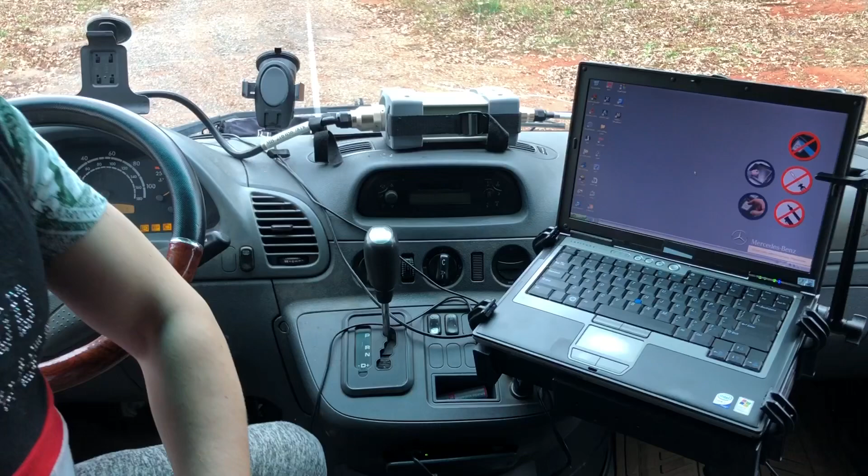In today's video, we're going to be using my new Star Diagnostic system, and we're going to try to diagnose this Sprinter van. So anyways, I have everything plugged in. Here's the multiplexer right here, everything's connected, and I got my key to the second position. So let's go to Xentry, double click that, and open the system up.

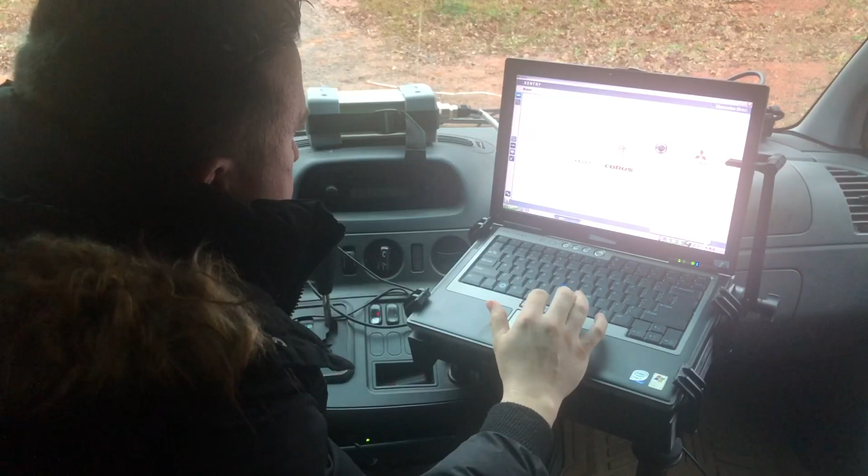Let's see what happens. So anyways guys, I'm into my system, everything's plugged up. We're just gonna go ahead and dive in. I will make more videos accessing all the systems, but right now the main thing I'm interested in is diagnosing my Sprinter van.

So we have all kinds of different models here, so I'm going straight to van, and I see Sprinter 2, Sprinter 1. Mine's a Sprinter 2. I just connected my Sprinter for the diagnostics for the first time, and turns out when the vehicle's off and the key's in the second position, it was giving me a communication error where I could not find the VIN number. Well, I turned the vehicle on and now it's actually communicating with this unit.

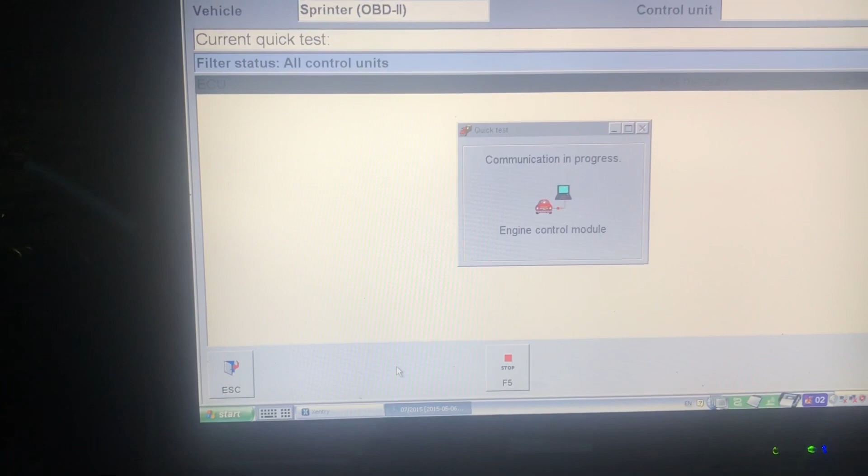So let's click F2 again, and let's do the quick test. The interesting thing about it is it needs to be running for this test to begin. I was already beginning to think, why is it not connecting? Because it's telling me that it's either a fault at one of the pins, like pin 11 where it plugs into OBD2, or with the system itself. So hopefully this is going to be working pretty good.

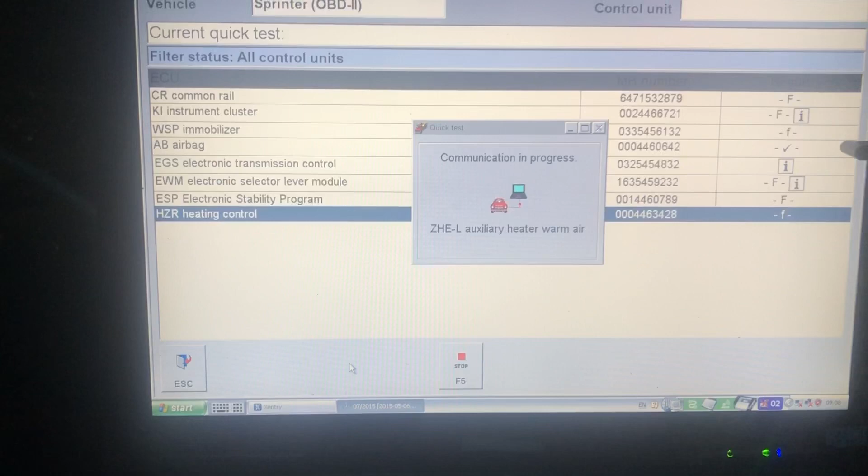Now I'm still very new to the system, but believe me when I tell you, I'm definitely going to be studying this thing, using my own Sprinters and looking into all the diagnostics. The very first thing, but not the last thing, I want to do is remove the speed limiter on this Sprinter. I would like to have it go unlimited speed, even though I'm not going to be using it, but that's something I definitely want to do. And I definitely want to find out what's wrong with my ABS system, because the ABS warning light is on, as you can see, and the check engine light is on as well. Definitely interesting what's wrong with that. Let's see if I could actually test that further.

So, some of the tests I'm going to do right now - it is dark, but this is gonna be my first run at it, and then I will learn from it and move on, and make a second test when I'm actually getting the data results.

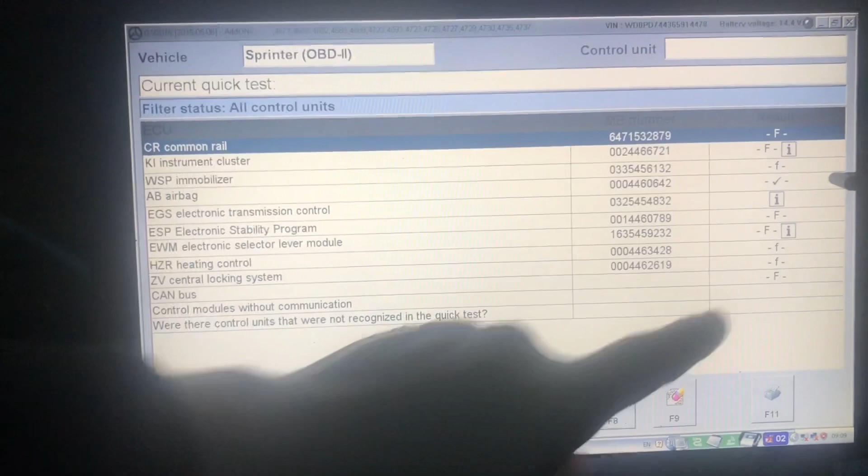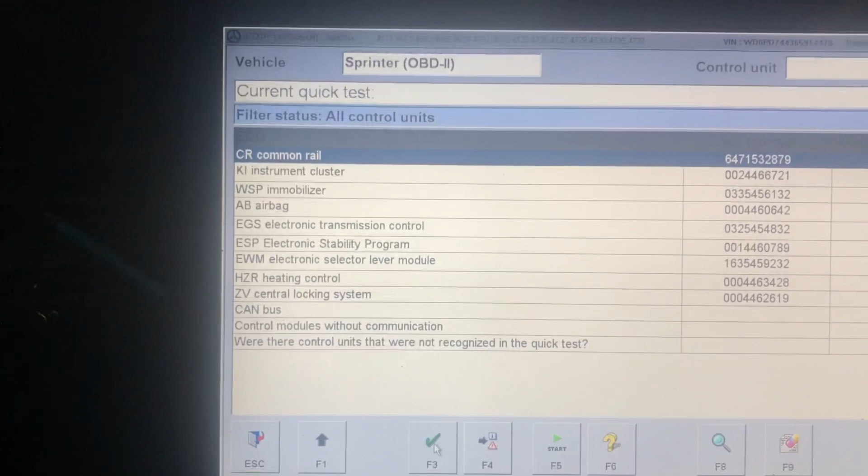Obviously F means fault, and then we have fault with information, which is an I. The check mark means it's a pass, and I don't know if this is right, but it seems to me that we have a lot of faults. I don't know why this would be, if it connected the proper way. Yeah, let's see here. Yeah, there's definitely a lot of stuff.

CR, common rail. Let's just go ahead and test that. Okay, so I need to confirm for the safety. Control unit, current fault codes. Let's do stored fault codes.

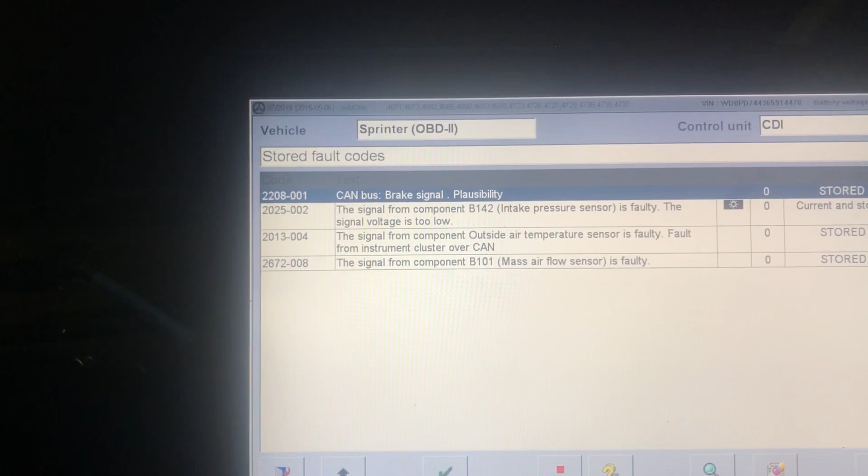So what do we have here? This is the signal from component B142. Intake pressure sensor is faulty. The signal voltage is too low. Current and stored. The signal from component outside air temperature sensor is faulty. Fault from instrument cluster over CAN. The signal from component B101, mass airflow sensor, is faulty. Wow, mass airflow sensor is faulty.

It is interesting - a lot of times these codes will get thrown if just one thing malfunctions, then everything malfunctions. So from what I could see already, this little light thing indicates that this is current. Obviously this is not. So let's see what my options are. Let's see, what is the stop here? Stop monitoring. We have ambient data, delete fault codes.

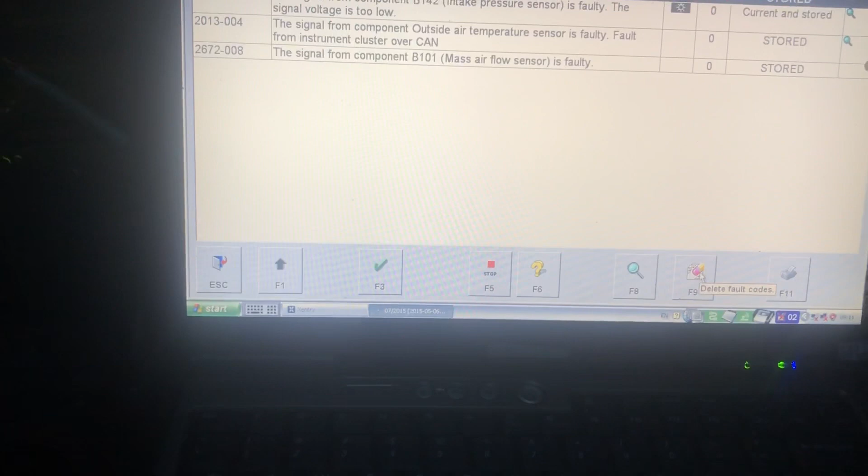Okay, let's go ahead and delete these fault codes. Switch ignition off, it says. So let's see. Ignition was switched on, so let me see if we can hit OK. So it just crossed those things out.

Now let's see here. It may be already disconnected, so let's just hit the faulty error during initialization. So I'm gonna go ahead and put the key to the second position, switch off ignition, and then switch on.

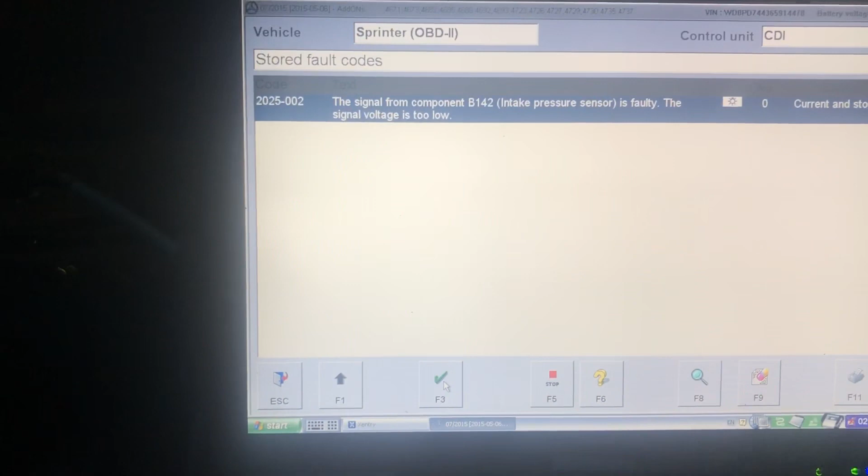So I did that. Intake pressure sensor is faulty. So it obviously came back. Intake pressure sensor is faulty. Intake pressure sensor - so it almost sounds like it's a barometric sensor that's on the airbox. I thought I'll note this. It seems like we experienced a crash.

I had to do Control-Alt-Delete to basically get rid of that stuff that was malfunctioning. So we're gonna access the diagnostics again. Let's see what's gonna happen. We're gonna hit F2.

So basically I'm just selecting continue, and it's hopefully gonna do everything else.

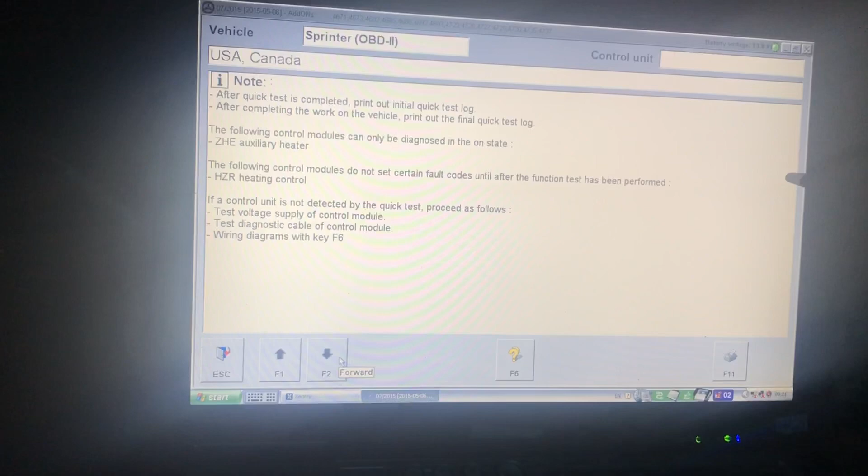So I could see that this appears. It's like a lock thing towards the bottom, it's crossed over. I don't know what that's supposed to mean, but as soon as we hit this, that's what we got. So we're gonna do a quick test. And what I want to do this time is see what the repair procedure is going to be, because it should actually give you a repair procedure.

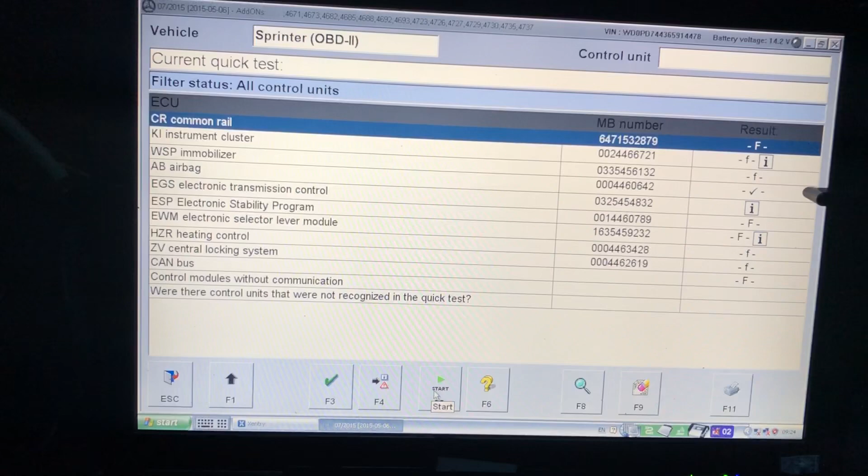So on the very next run, everything has pulled up again, and we have some choices here. We have common rail, which we tested before and it came with a fault, and looks like we have plenty of faults here. So we have an option to start, and we have other options as well, like switch to control units with fault codes and events. And I wonder what this glass here is, so let's just click that.

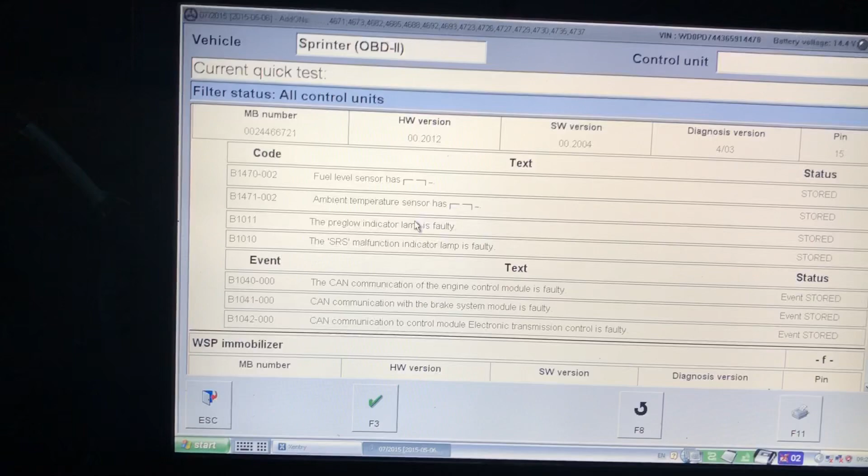And MB number, let's see. What's interesting is once I hit that glass, it's telling me some of these other things, like fuel level sensor has whatever, ambient temperature sensor has whatever that is. The pre-glow indicator lamp is faulty - interesting, so that obviously has to do with like a cluster. And then we have the SRS malfunction indicator lamp is faulty, and CAN communication of the engine control module is faulty.

CAN communication with brake system module is faulty. So that's what I was actually thinking - the brake system module, which is like the ABS, could be faulty itself. That's what's causing my ABS issue. CAN communication to control module electronic transmission control is faulty, so the electronic transmission control module looks like it's faulty too. That I could see happening.

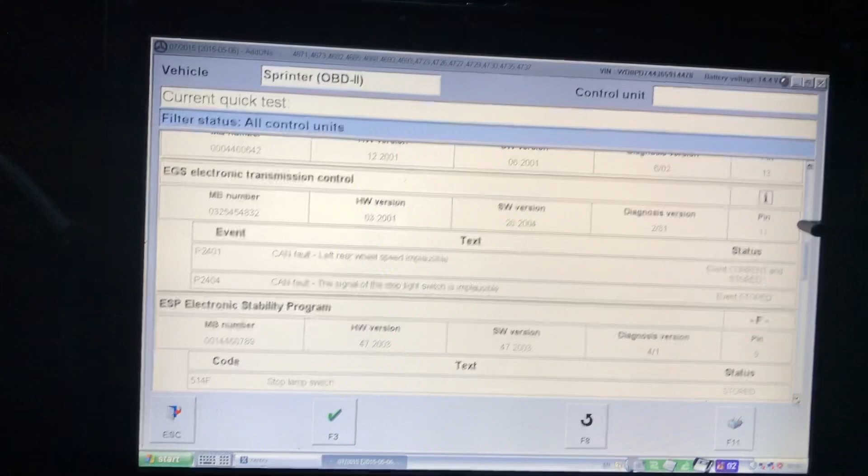When I drive this Sprinter, I'm not even, you know, this scared, but upon looking at everything it's got all these faults. Imagine going into the dealer - it's like, oh man, this is gonna cost you. So we have a lot of stuff showing us here. Interface locking, so we have one more fault here.

Stop lamp switch, cable left rear axle speed sensor, current stuff. Okay, that makes sense - left rear axle speed sensor. So it says cable, so there's a possibility we have a fault inside of the cable. I actually did the wiring job on it, so probably did a pretty bad job. Cable RPM sensor stored.

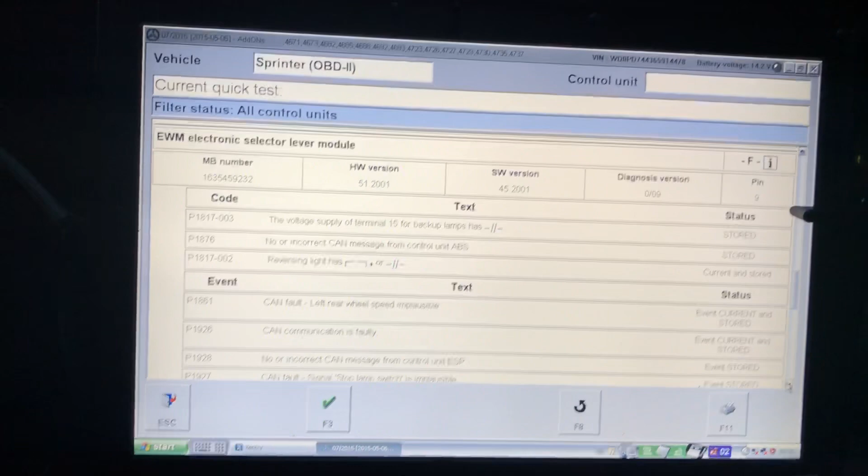The voltage supply for terminal 15 for backup lamps - yeah, there's actually a problem with that for the backup lights, that's not working. No or incorrect CAN message from control unit ABS, so yeah, the actual ABS unit is possibly bad. Reversing lights has whatever, wheel speed sensor implausible.

I know one thing is, this is not scaring me at all, and it basically means we are getting somewhere with this. We have a lot more information in our hands now. Let's see, the interface with the radio remote - okay, radio remote, I didn't even know it had one. The crash sensor has unlocked the doors.

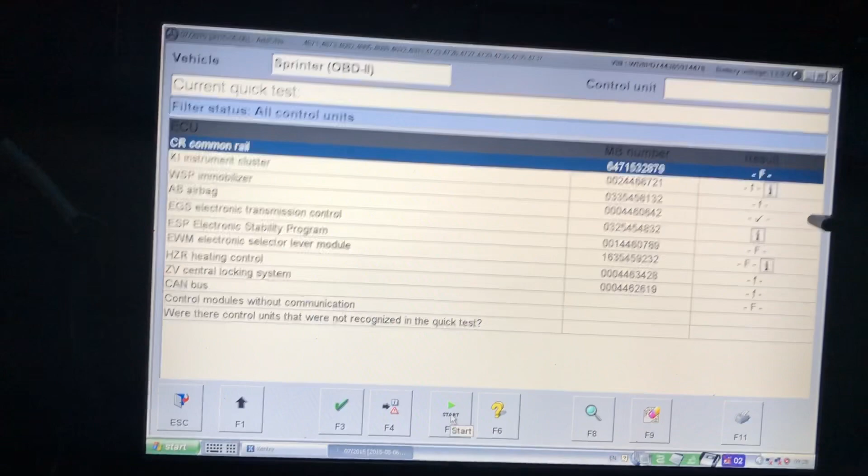Okay, so what else? We have back, so we could do a start. Let's see what a start does. So data is being... that little start is just basically going through, again, the process of diagnostics again. Maybe I fixed something and that's now gonna go through every single system.

Once again, it gave me all the faults, and there's a lot of them. And the interesting thing about it is there's big F's and little F's. So big F, probably big problem, little F, small problem. I hit F4 now.

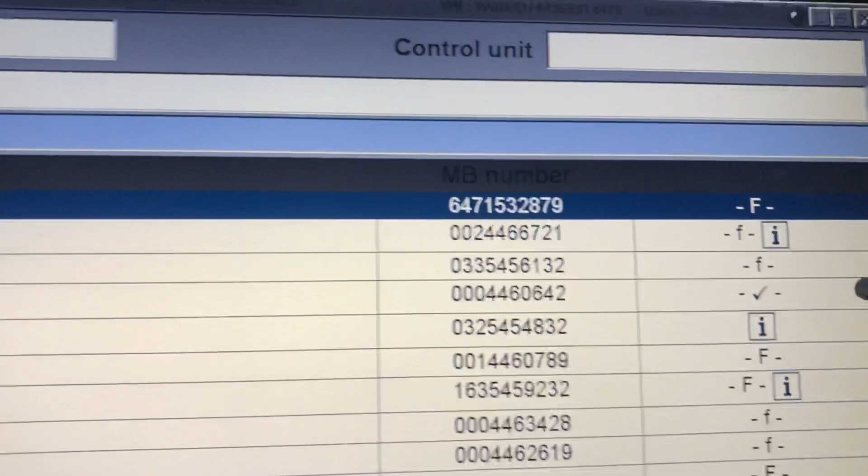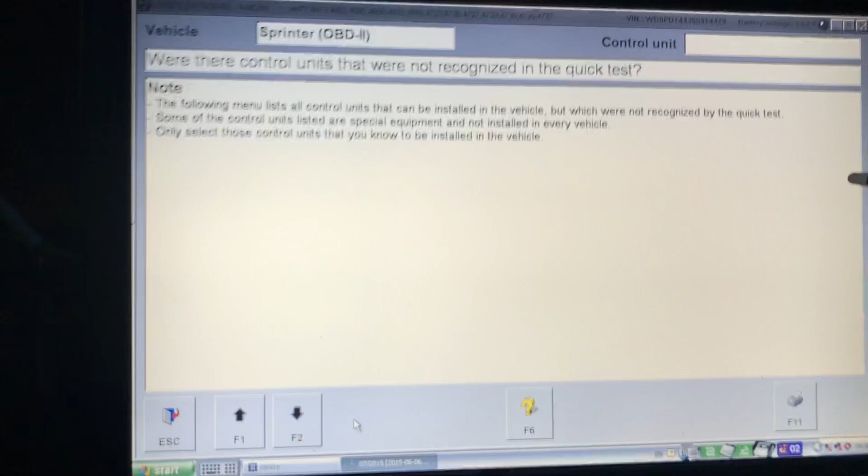So it looks like I could kind of go through partly the systems, like let's see, common rail, and then boom, boom, it sort of gets rid of some stuff and leaves some stuff. Selected were there control units that were not recognized in a quick test, and I'm gonna select that. So I'm okay with that.

Now what is this - view stored quick test. So we have the printing, then we have the question mark, help. Good, I'm going to select help. Okay, let's see what this means.

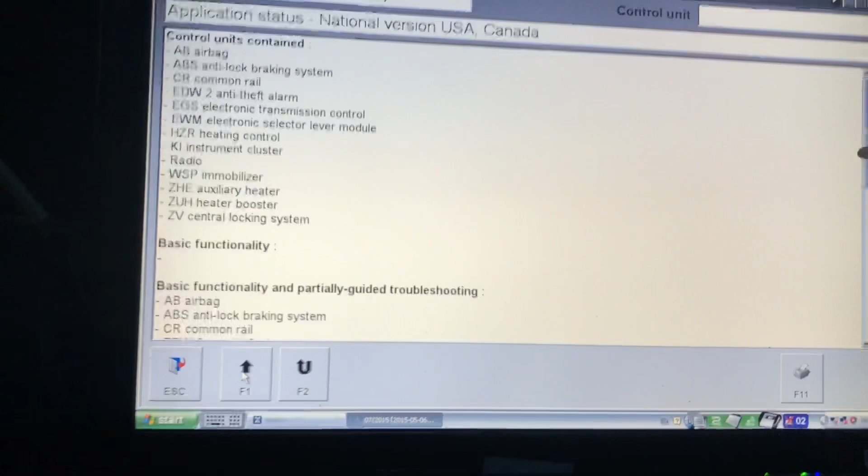So this seems like it just gives me definitions to some of the stuff. Let's see, wiring diagrams. Let's see, ABS. So is it pulling up wiring diagrams for ABS? That I would like to see.

So it pulled up something. So I guess this is if I was servicing the vehicle, I would have all of this stuff, all these documents. In red, it's definitely clickable, and it's giving me wiring diagrams, most definitely. So apparently I can zoom in, and we have like a zoom out lens right here, so you could take a look at the diagrams up close.

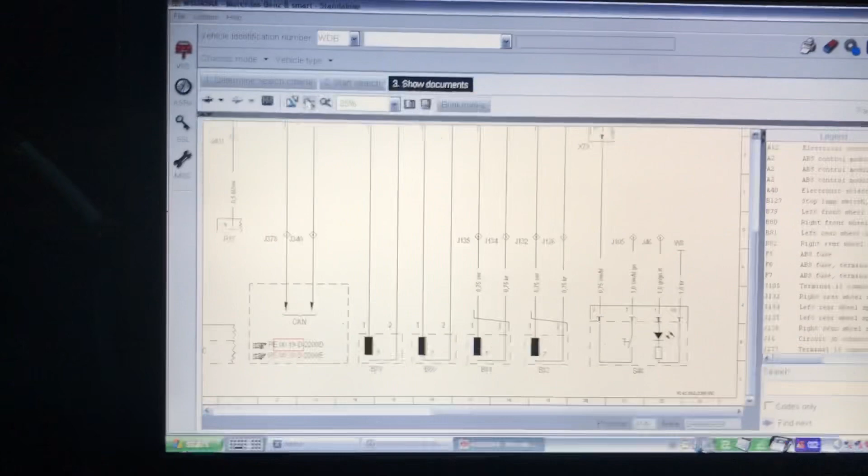If I double tap it somewhere on the screen, so far nothing happens. But basically I could just do that, I guess. And right here we're at 400%, you could just do 50%. Well, I went to some more systems, but one thing I do want to point out: F1 is for going back, F2 is for going forward, and F3 is pretty much for choosing a selection.

So I'm just going back to F1. This is the instrument cluster, and that's what I'm going to—the transmission control module, electronic transmission control. Current fault codes, let's see if we have any.

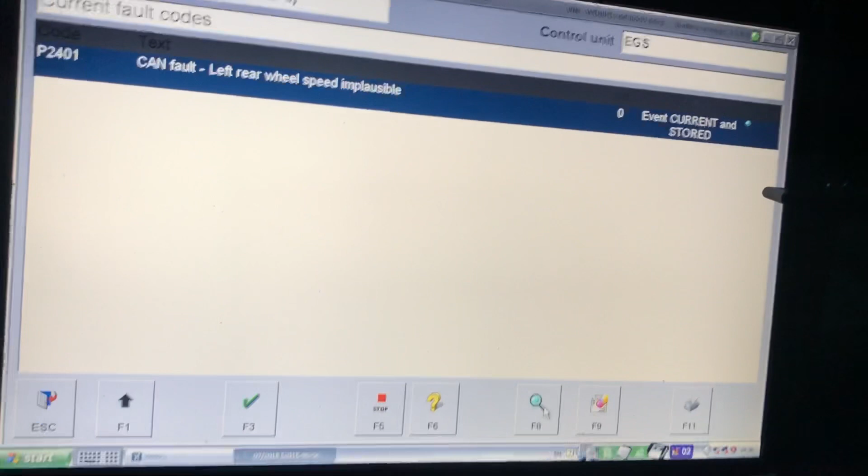And I wonder if we have any stored. Fault: left rear wheel speed sensor. So this is that ABS problem that I'm having. Let's see what this is gonna give me.

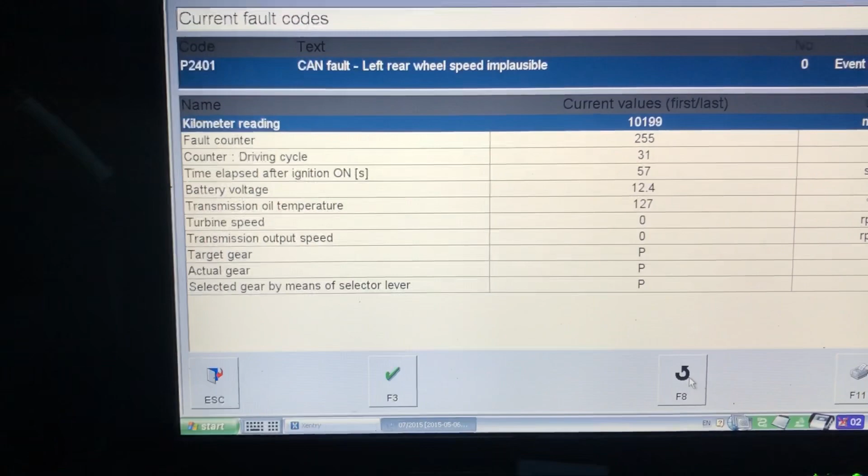So when I select the magnifying glass, this is what I get. If I take this on a test drive, some of these turbine speeds will be moving and stuff like that. You could actually test some of the stuff while driving. Probably be a good thing to have somebody with you or record this data. I don't know if you could record just yet.

This is some more transmission codes that I got, part of that system, stored fault codes. We have left rear speed sensor implausible, and we have the signal of the stoplight switch is implausible.

I have entered the solenoid valve test, so we will select that. Solenoid valve test for all control valves and shift valves. Requirements: park and brake operated, engine off. Wow, engine off, no fault code stored. Selector lever in position P.

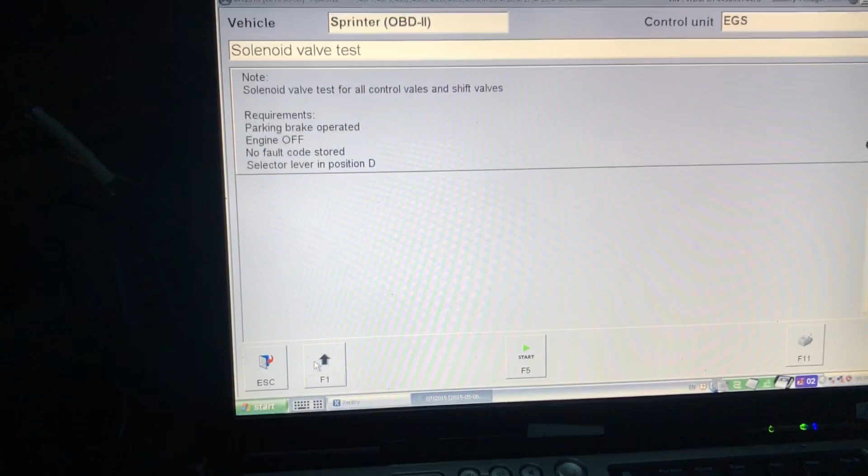Interesting. And then I could pretty much hit start. Let's just hit start with the engine being on. Yeah, looks like—because actual value is not within range, okay, so it's aborted. It's fine, gonna hit back.

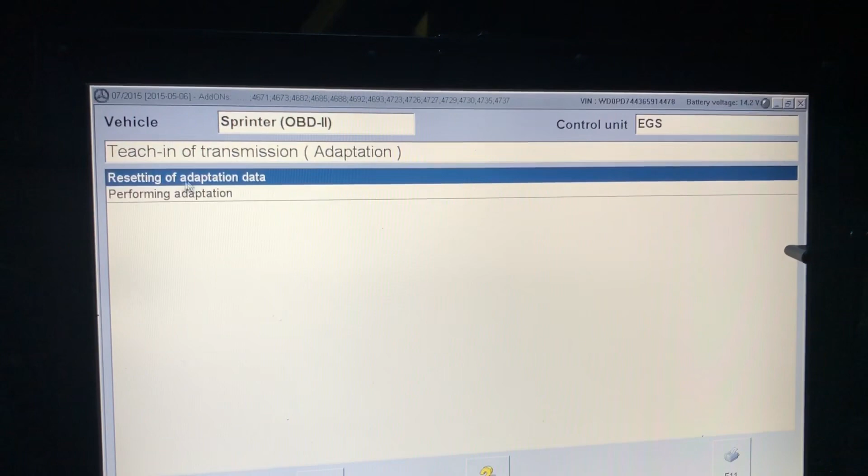Control unit adaptations. Here I could perform transmission shifting adaptations, and we're not gonna be doing that right now. But supposedly if you don't like the way things are shifting with the vehicle, and you think there's a problem, you can actually do some shifting adaptations. I have the choice to perform adaptation or reset all the adaptation data. So we're not gonna be touching my shifting at this point.

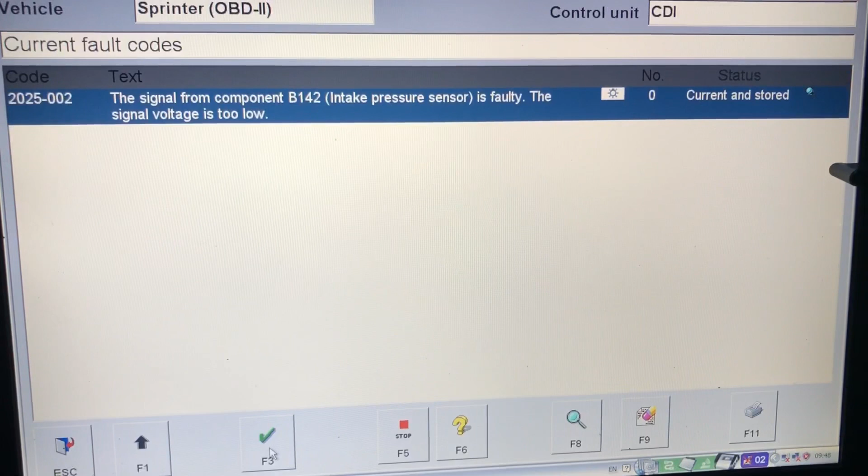Here's my current fault: 2025-002. The signal from component B142, intake pressure sensor, is faulty, and signal voltage is too low. I'm gonna attempt to delete it. So let's go ahead and actually hit erase.

Yes, ignition is on right now, by the way, guys. Switch ignition off. Switch on ignition. So there we go, came back right away, so I'm actually deleting it again.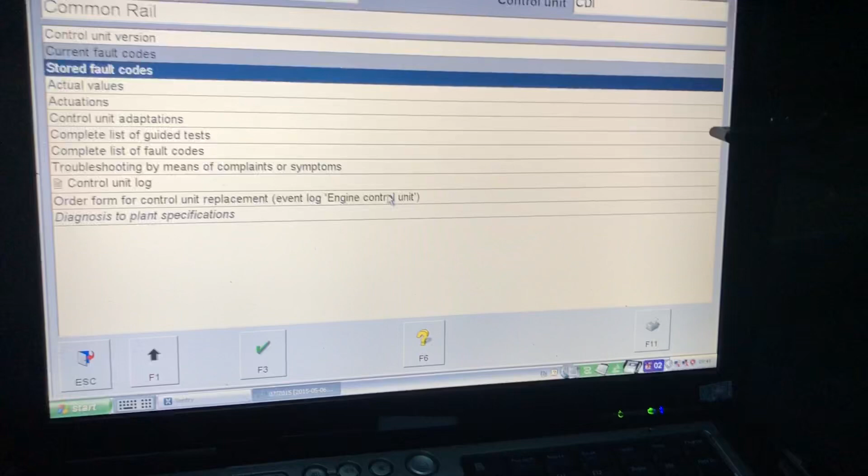Switch on ignition and stored codes. I'm gonna go ahead and just click that. So I don't see it right now. Oh, it's reading—yeah, it looks like it just came back, so it's fine. So basically, guys, the reason I'm deleting it is just to see how quickly it comes back.

Obviously, we have a sensor that's faulty. It's just going to keep throwing this. But you can delete them sometimes to find out if it's going to come back, because it might have been tripped by some other sensor, just to be sure.

Went into another place where I believe you could actually adjust the RPMs—it says max working speed, minimum working speed. So we got 2000 for max working speed, minimum 1999. So it is quite interesting.

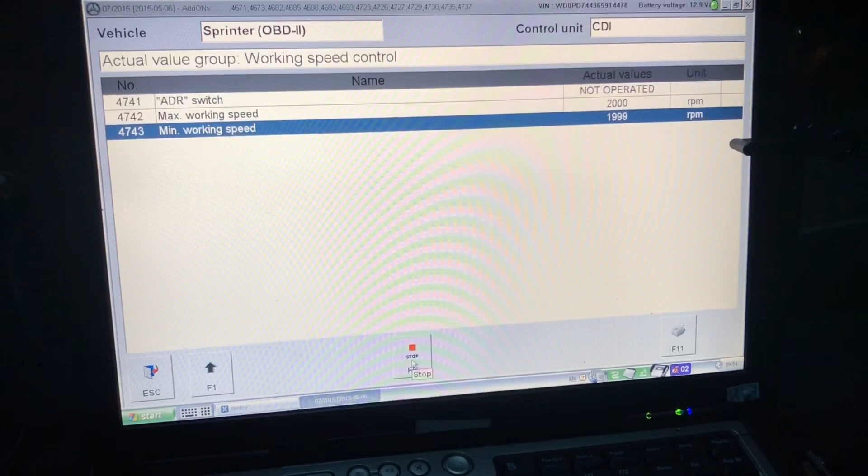Let me see if you could actually do anything besides going back. So it seems like you can't really do anything here. So it's just basically showing you the actual values. You could just take a look at stuff like cruise control and other stuff.

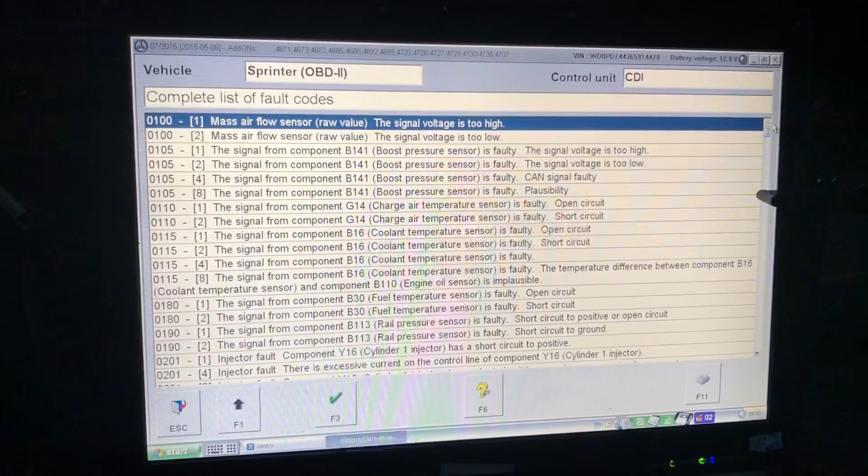Here's a complete list of fault codes. There it is. So this is actually kind of cool because I could probably print this and just basically use it as a reference.

I named the file fault codes list and we just put print to file. So I'm just gonna go ahead and hit print. I don't know where the file's at, but I will find it.

Here we have the troubleshooting: engine starts poorly, poor engine performance. So which one should we test? Engine starts poorly? Okay.

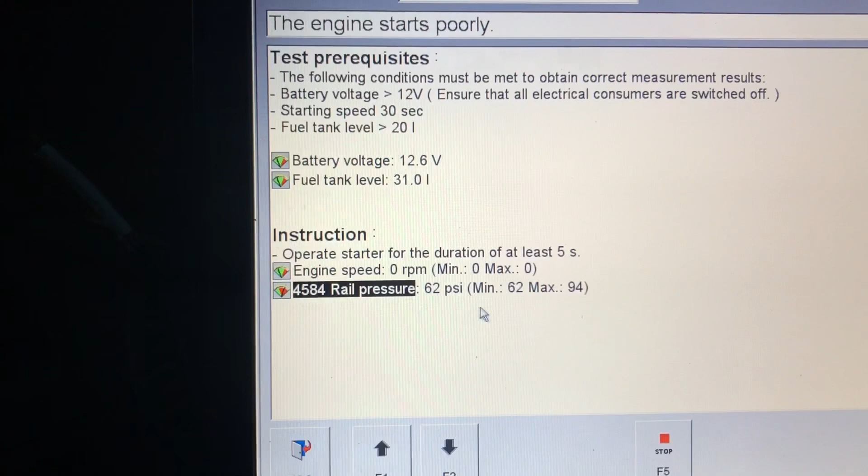So here's some of the instructions that I get. I believe it's kind of like really taking a look at the instructions for my vehicle. Because it's giving me engine speed is 0, minimum max, and then fuel rail pressure, 4,584. You see these numbers just actually fluctuate a little bit.

So let's see if I could proceed to go forward. Is the engine speed higher than 200 RPMs? I don't know, what do you think guys? I'm just gonna put no. Check, and if necessary, replace the starter and battery.

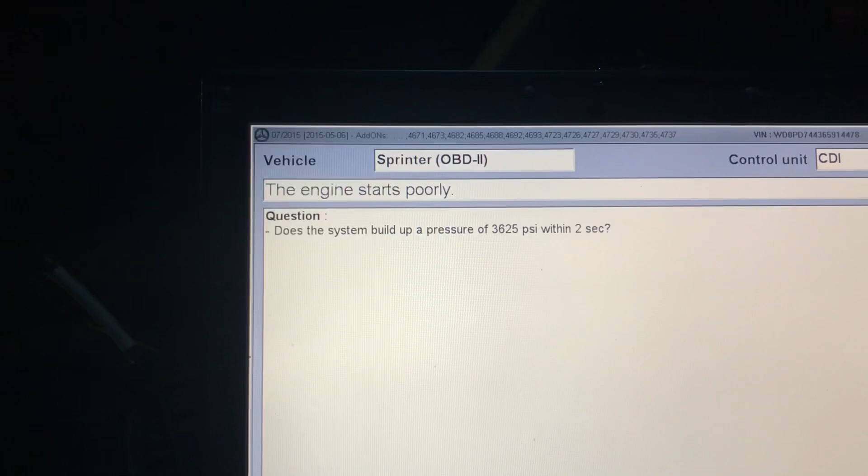Okay, that's a little bit decent. So we could hit forward. Engine starts poorly, and then we're gonna hit F2, and in this case we're gonna say yes. Does the system build up pressure of 3,625 psi within 2 seconds? Let's just say yes.

Inspect pre-glow system, carry out components test. Let's see if I select no. Test fuel pressure at fuel filter. Okay, let's say test fuel pressure at fuel filter. So let's see what happens.

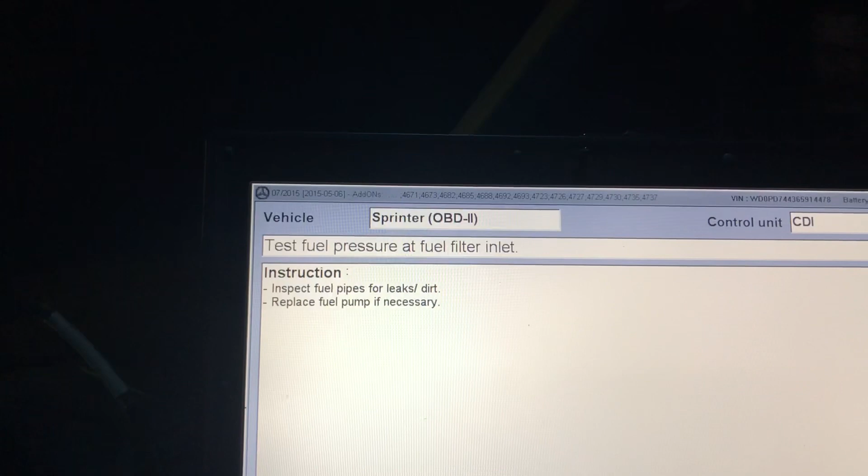Question: is the fuel pressure measured between 55 psi and 80 psi? I'm just gonna put no. Is the fuel pressure higher than 80 psi? No. Inspect fuel pipes for leaks, dirt, replace fuel pump if necessary.

So this is really nice. It gives you sensible directions that you could actually quickly test if you're actually working on a vehicle with simple questions. Let's see if I answer that yes. And then we hit forward, end of test.

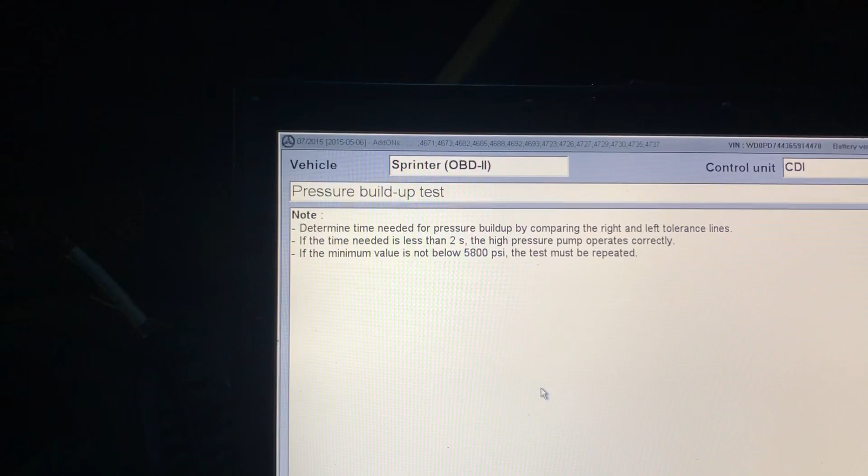Pressure buildup test. Determine the time needed for pressure buildup by comparing the right and left tolerance lines. If the time needed is less than 2 seconds, the high pressure pump operates correctly. If the minimum value is not below 5,800 psi, the test must be repeated. Okay.

So it gives me actual values of my coolant, specification valve, engine at idle, 500 to 1,000. Okay, interesting.

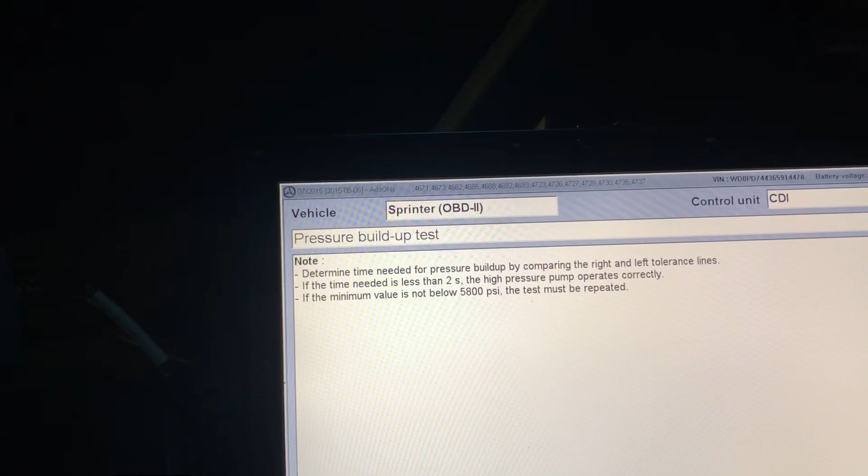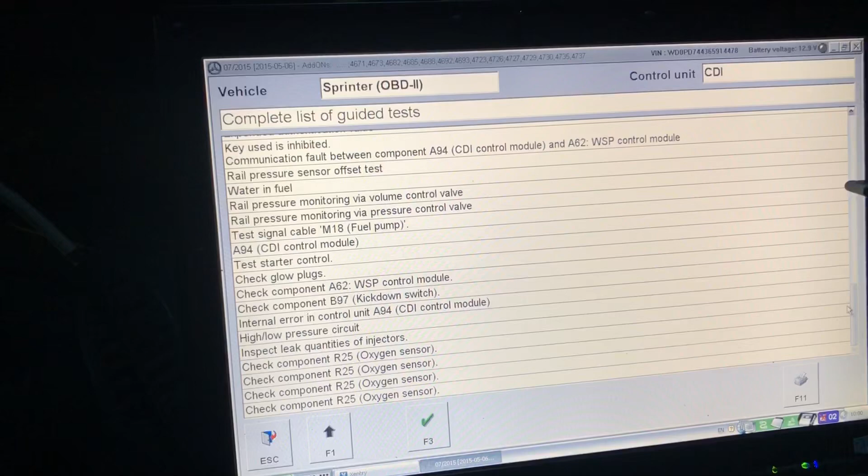All of these things is highlighted. I already been there. We have a complete list of guided tests. So we have all of these things that we could actually test. Lots of them. That is kind of cool because, you know, it means that there's a procedure to follow, and eventually it's going to lead to a fix.

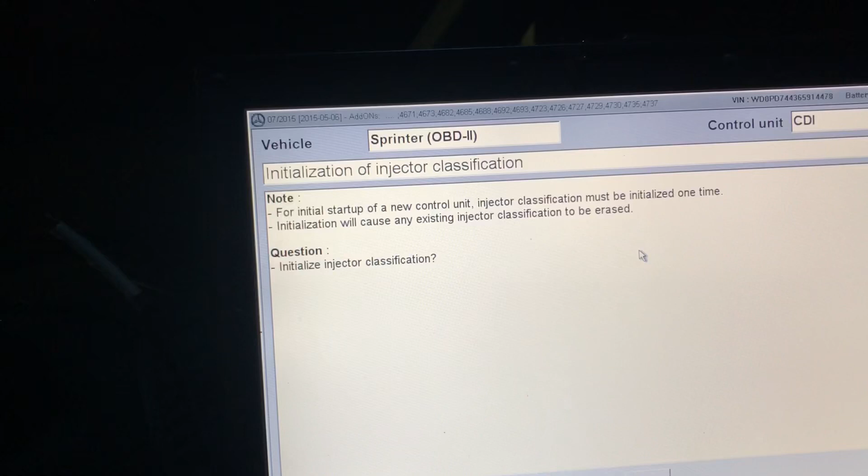So we have initialization of injector classification. This sounds a little bit scary. Note: for initial startup of the control unit, injector classification must be initialized one time. Initialization will cause any injector classification to be erased. So I'm going to put yes. Injector classification was initialized. Injector classification for individual cylinder can now begin. Wow.

Let's just do forward. Let's hit select. I'm just gonna have to actually get out of this system.

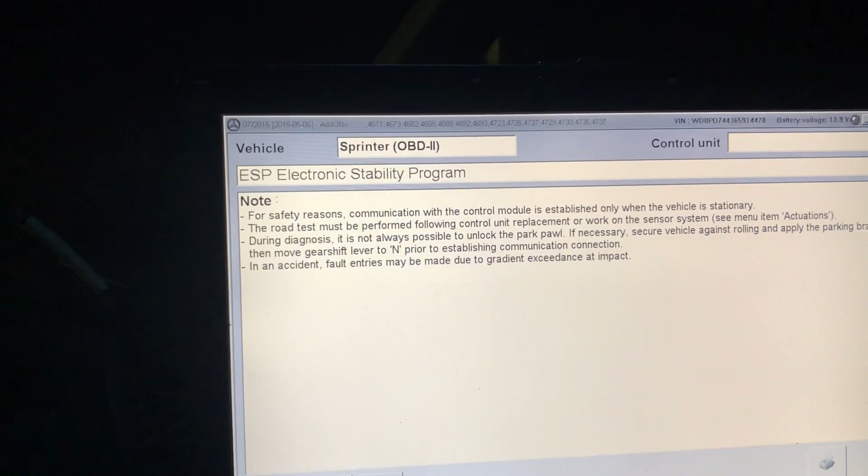Here's the electronic stability program, and that one is kind of faulty at this point. Current fault codes. So that's actually has to do with a cable, left rear speed sensor. Cable RPM sensor, cable left rear speed sensor. So it seems like there's an issue with that cable.

Diagnosing my radio, which has a code, and it just came up. Print my radio file. I'm able to test the screen darkness, brightness for the radio. It even has cassette cannot be ejected, cassette fault jammed. For the longest time, my radio code was basically there, and I don't know my radio code. And by me accessing my radio, I didn't even have to unlock it or nothing. Just basically access the radio, and I could just start testing stuff.

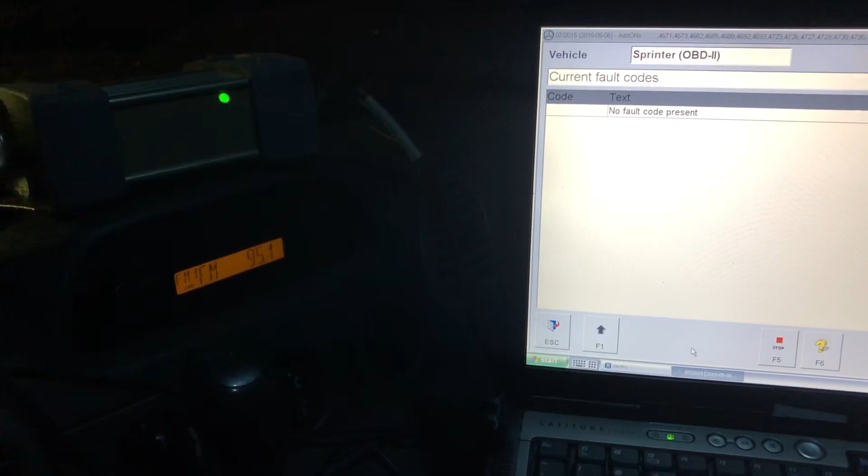When I exited the test, the radio's still on. So if you guys have a radio that's not working and you're kind of stuck, I could help you with that. Access the maintenance type intervals, and I got minus 8088, and I don't know what do we have here. Yeah, 8100, you see? That's pretty much what I have here.

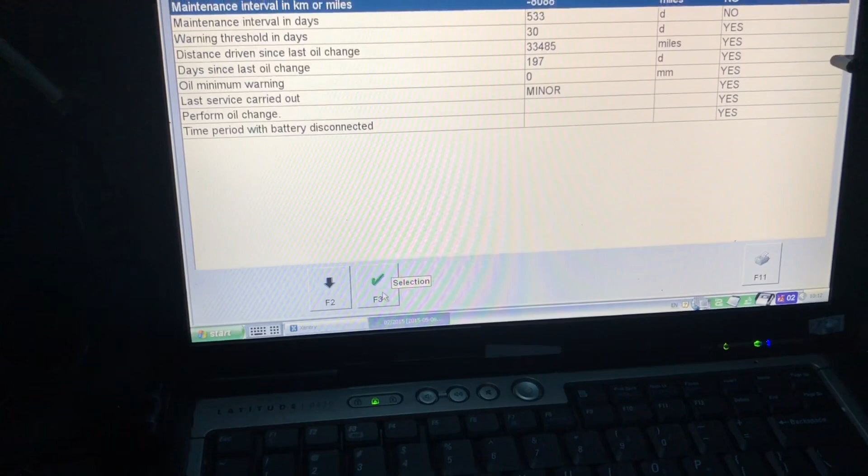So let's go ahead and select that, see if I could actually reset my service lights. Actually hit forward, and looks like it started blinking right away. What do we have here? The distance driven since last oil change, in miles. So let's make that a 1.

So let's see what's gonna happen now. So I guess now that's next service after 12,000 miles. I'm guessing, because that was a minus, and now it's going to be counting down from here. We will see about that. That's definitely really cool.

Warning threshold in 30 days. We don't need that kind of warning. Let's see if we could actually change that. Let's do 365 days. I mean, 30 days is a little bit excessive, don't you think? Correct entry. Oh my goodness.

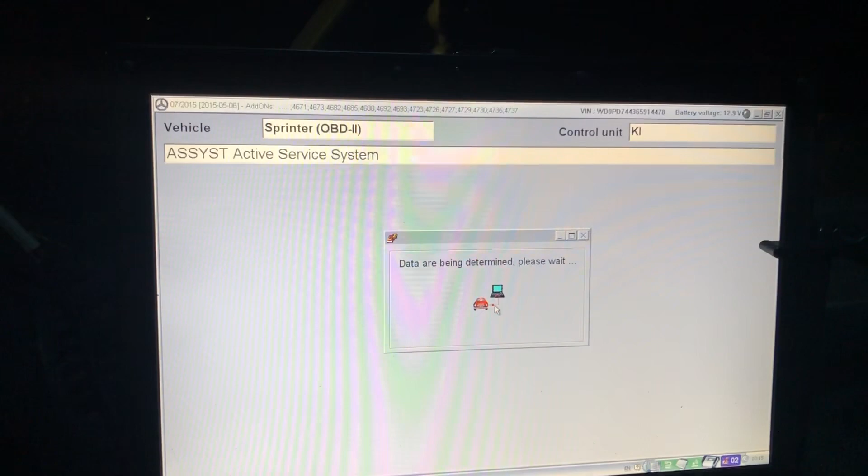Let's see, let's do that again. So let's do 99. It says between 5 and 30. Okay, I guess 30 is gonna have to do.

Days since last oil change. Wow, days since last oil change. Let's just put 1. 197, it says. No, it's 1 day. So maintenance intervals in days.

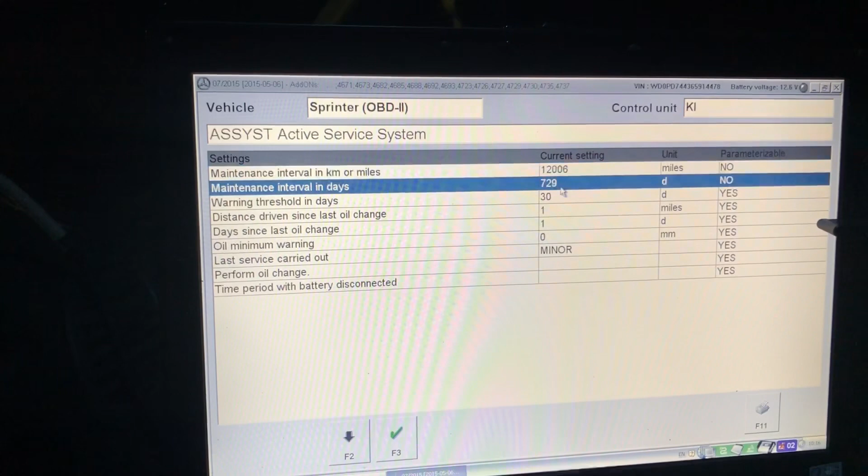So in 729 days, maintenance. Okay, oil minimum warning. Let's see what this one, if this is going to give me a warning.

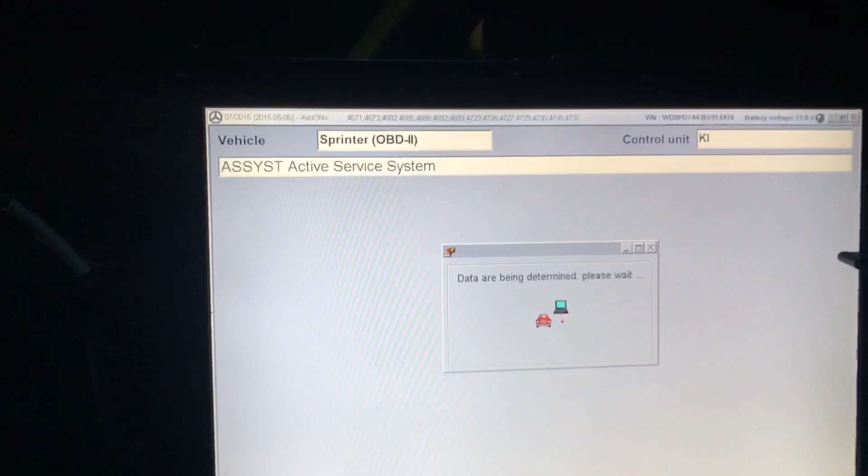So if the oil minimum warning is activated too soon or too late, it can be set. The setting is performed in millimeter steps. Positive means the oil minimum warning is activated too soon. Negative means that the oil minimum warning is activated too late.

I really don't want to mess with that. Leave the oil alone.

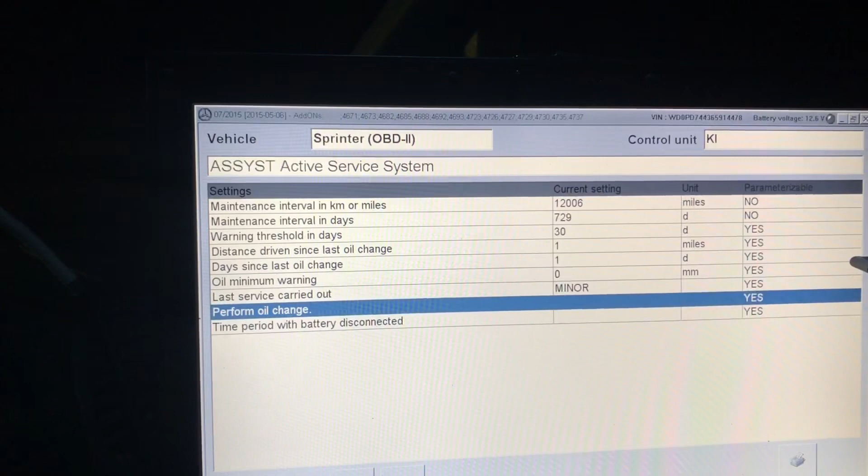Time period with battery disconnected. Perform oil change. Perform oil change. Okay, remaining distance.

Let's see, what is this? Has an oil change been carried out? Yes. Remaining distance and remaining time are set in this case.

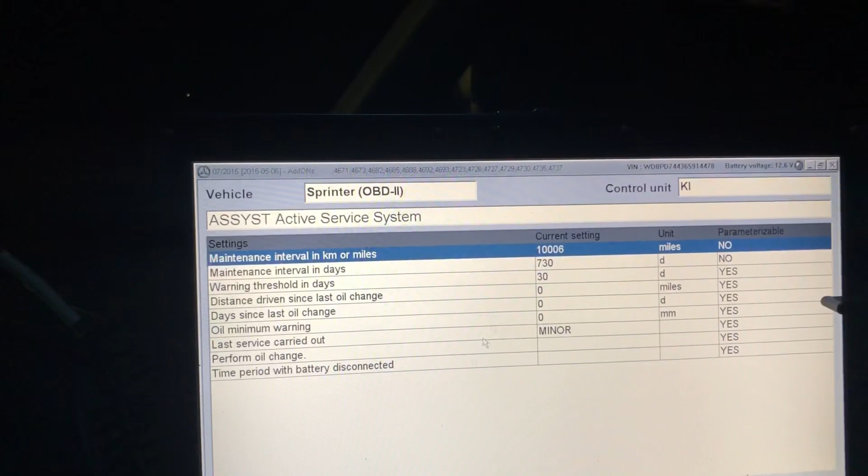Question: has oil change been carried out? Yes. Let's see what's going to happen now. Okay, so looks like that's now 10,000 instead of 12.

And yeah, 10,000, so 10,000 miles. Next oil change. Perfect. Tire size.

That's cool, I could do all this cool stuff. So this is control unit adaptations, setting the main odometer back. What? I could change my odometer reading.

Automatic control module replacement. Manual replacement of control module. Let's see, set the tire size. So this is what I have here: 225 by 75 R16s. So I could choose 225 by 70 R15s.

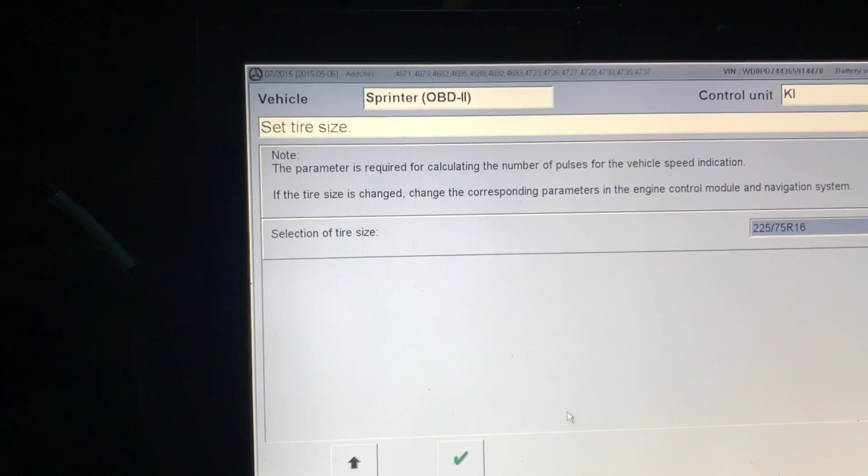So we have the 16, so we have the good stuff. So we don't need to be changing that. So it looks like if we got 15s and you want to move more up in size, then that's going to need to be changed inside of the computer. So we're going to basically go ahead and just go back.

Okay, so setting odometer back. The main odometer cannot be set back in the USA. So it looks like odometer cannot be set, which I would not be doing anyways, but it would be interesting to see if I can.

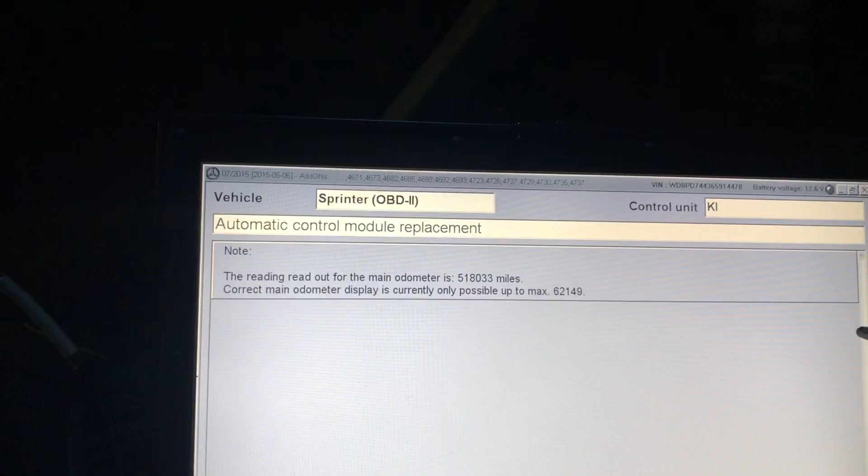Automatic control module replacement. Let's see what happens here. The reading, read out the main odometer is, okay, so 518,000 miles. Correct main odometer display is currently possible up to 62,000. Interesting.

Switch off, and wait a minute. No, that's if, or is it? I really don't want to do anything in here in this type of area, but it's fun. It hasn't been performed, so it looks like I'm gonna have to perform it.

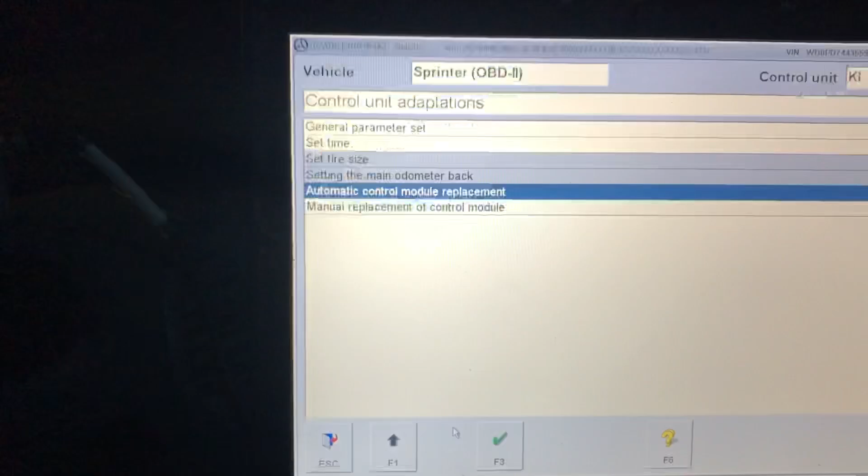So it's blinkety blink, it appears that I could actually set the clock. It's parked, so 10:53. In reality, it's 10:54, you know, we have to be precise here. So we're gonna go ahead and change the clock. So 10:54 now. Actuations, let's go into this one, indicator lamps.

This actuation equals the indicator light test. When the ignition is switched on, all indicator lights parameterized in the instrument cluster are activated with F5 key. So let's see, I'm hitting the F5 key.

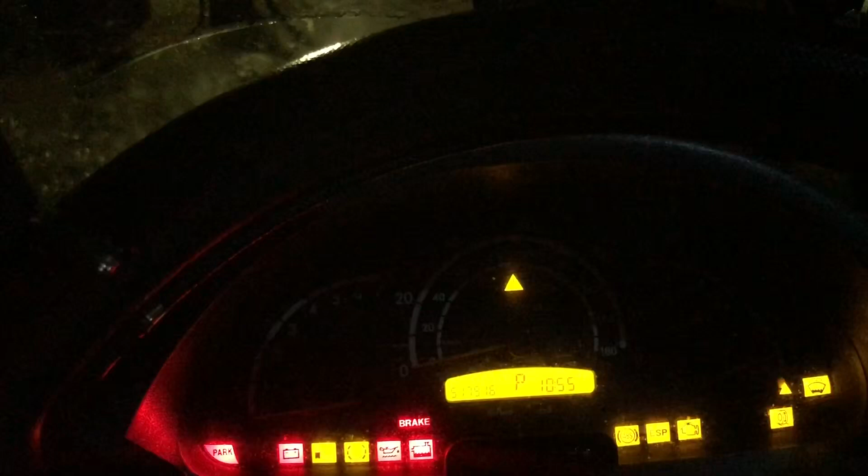So all of these lights just came on. Wow, scary. Yeah, I don't see the glow plug pre-warm type of light, so I could actually turn it off with an F5. So that means I could actually technically test all of these lights, see what really comes on and what doesn't. So we have water and fuel filter, brake light, water too low.

Oil level too low, battery park, all of these good things. So I just turned it off. I really don't want to be driving with that Christmas.

So let's see, move instrument pointer. What? Move instrument pointer? Are you serious?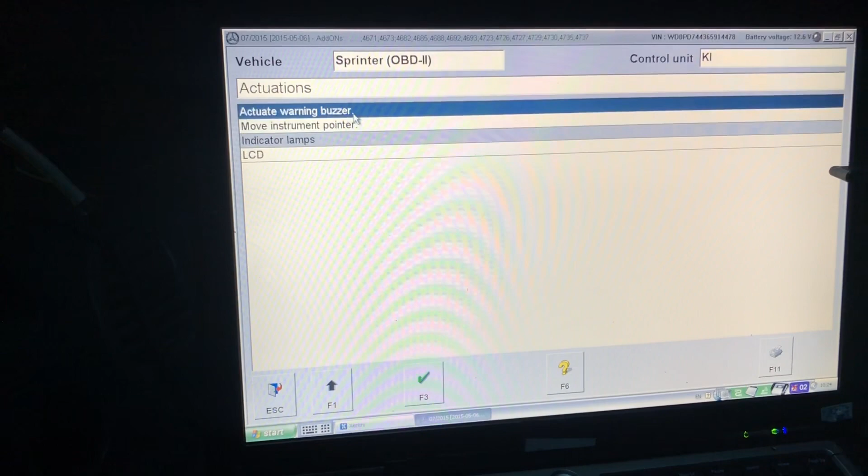Okay, let's start again. So it looks like that's the warning buzzer. Let's see what the LCD does.

The LCD of the instrument cluster is activated by pressing F5. Let's see what happens. Wow, look at all that. That's a crazy LCD. So I just put everything back, but I have a blank screen now.

So let's actually go back. That's kind of scary. Everything is back. So not that scary. Okay.

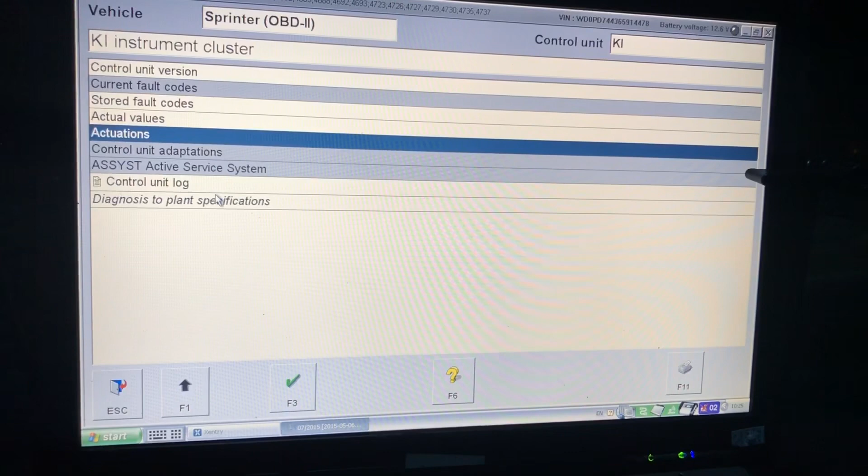Let's go back. Actual values, control log. Let's go back. See, we have like the radio. I actually entered that last time, and we have a backup assist, which isn't working. Instrument cluster I have tried. We're gonna go back again.

So you could actually perform some of this stuff. It's a little bit different menus than actual diagnostics. Let's see, air conditioning. We really don't want to do air conditioning. Let's see body, let's see what happens to the body.

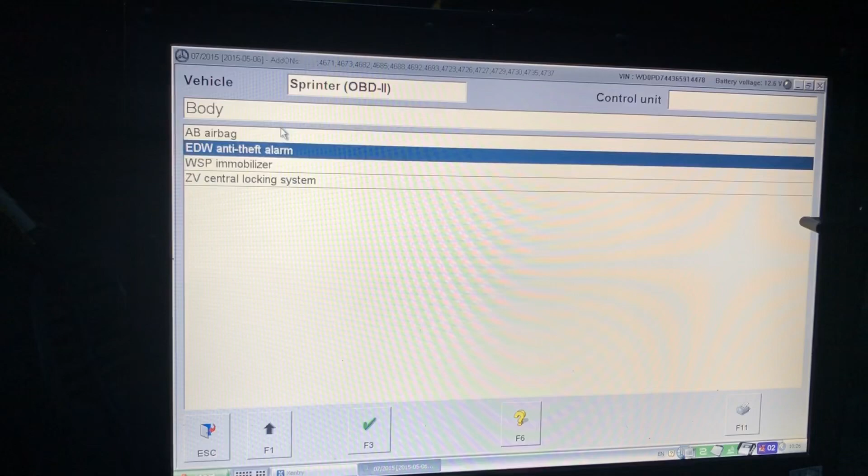Anti-theft alarm. What? Airbag. Airbag is kind of scary. Hopefully I don't make it activated. But let's see, current fault codes.

Let's see if we have any fault codes with airbag. Nothing was showing up, which is good. We really don't want anything. So we're going to go ahead and go back.

Anti-theft alarm. Let's see if this actually works. I've never heard of that anti-theft alarm on this vehicle. Error during initialization.

Initialization, no link. That's probably about right, there's probably no anti-theft alarm. Switch off ignition, then switch on.

We're just going to go ahead and abort this process. Let's see, immobilizer, central locking system. I really don't want to have to mess with the immobilizer, but let's see what happens.

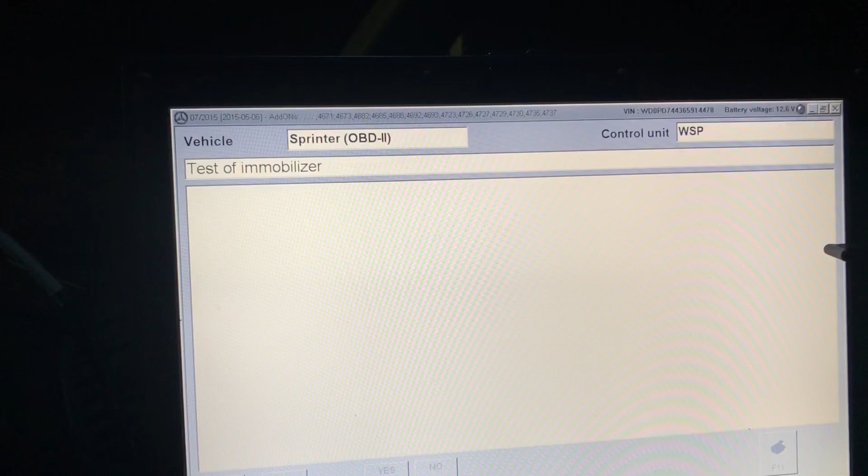Status of control module is okay, so I don't even see a back or escape option. Okay, so it just pretty much let me go. The immobilizer has its own set of controls over here, locking and enabling.

What, that's cool, learn transponder key. Locking and establishing, enabling transmitter keys. Display message: star error. We don't want that.

Looks like I could program some keys. Turn ignition on and off two times, six seconds. Well, obviously guys, this is for coding keys. I could code keys now.

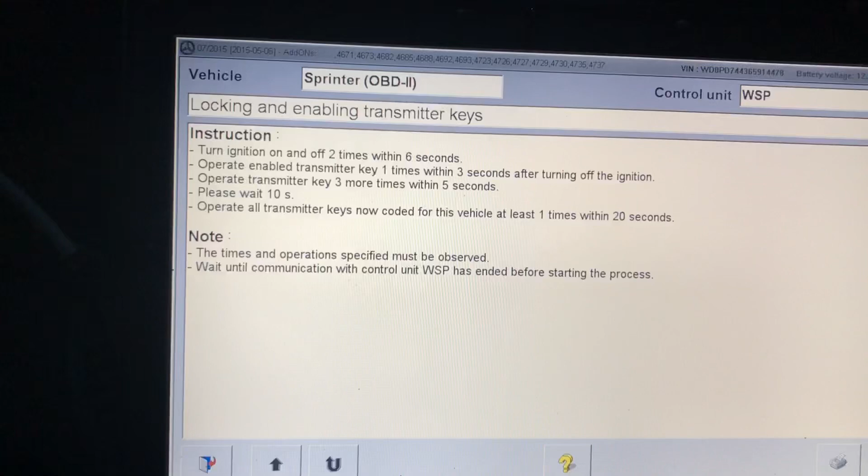Learn transponder key, let's see. Erase all transponder keys and relearn the current one. Wow, well, let's just go back.

That's kind of cool though, because last time I replaced the ignition switch, it came with its own key, and since the immobilizer is not going to recognize it, I had to replace the immobilizer and the computer because the computer would not recognize the immobilizer. So this would give me the ability to just replace the ignition switch with the key and then have that learn itself, which is kind of cool.

So I really don't want to mess with any of this stuff right now. I'm going to go ahead and go back. So that's body.

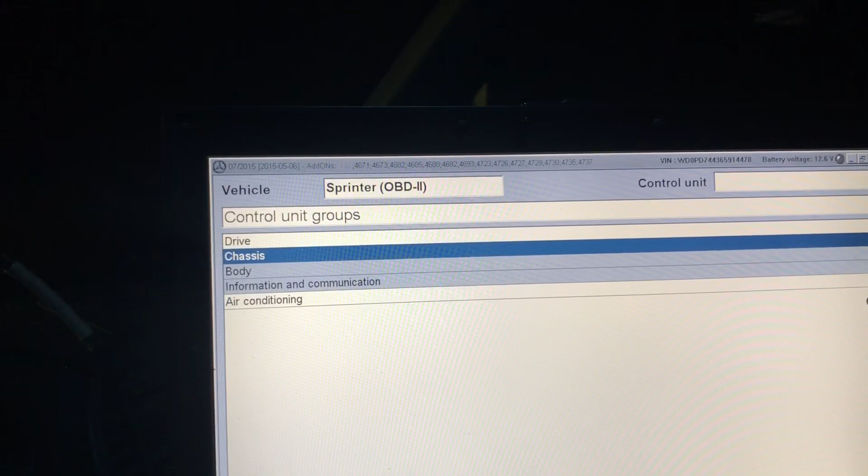Let's see, so airbag, immobilizer, central locking system - all that stuff is good. Let's go to chassis. ESP electronic stability program, anti-lock braking system - we already know about that. Here's the drive.

So CR, common rail, electronic transmission control. I already know it's going to throw a couple codes. ME, motor electronics, let's see what that's about.

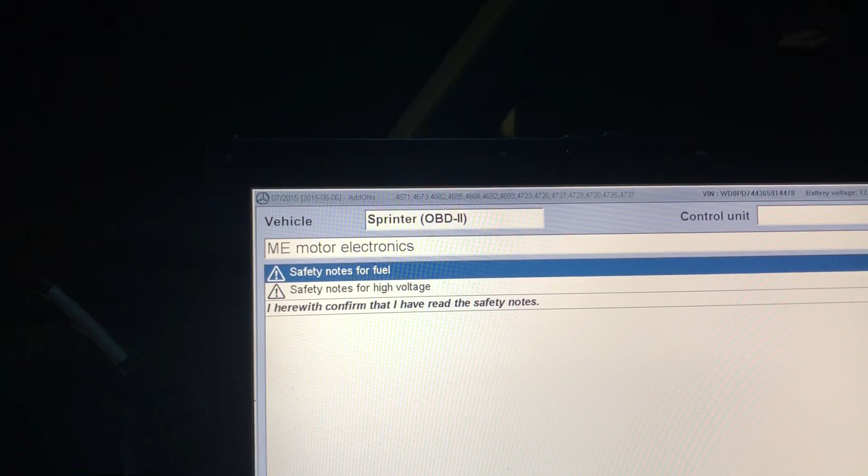Wow, safety notes for high voltage. I confirm. There might be risk. Forward. F3. Risk of explosion injury, okay.

So testing my intake pressure sensor for the actual values, and it's giving me 11.4865 psi. Let's say, is this okay? Guess it's okay.

Possible cause and remedy: in the event of stored faults with high fault frequency count, or in the event of customer complaints, check the lines and connectors for loose contact and corrosion.

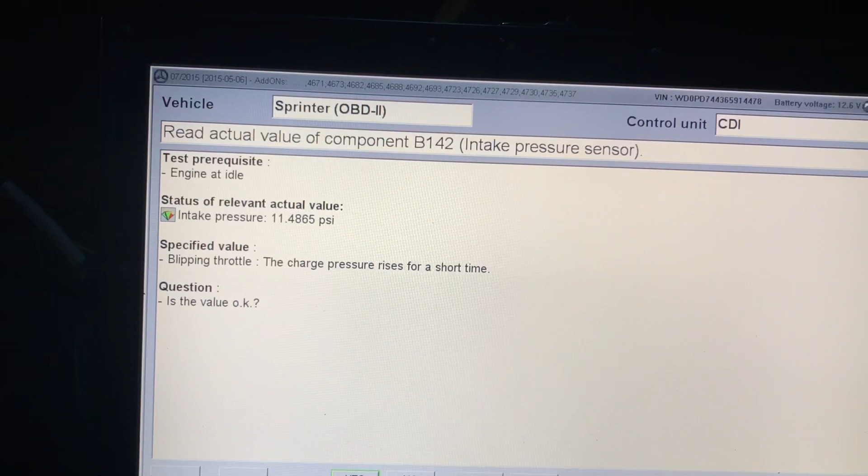Let's see, let's go back. Let's see, let's say it's no. It's not good.

Seems like it's about the same answer for that one. So is it okay? No. Let's go back.

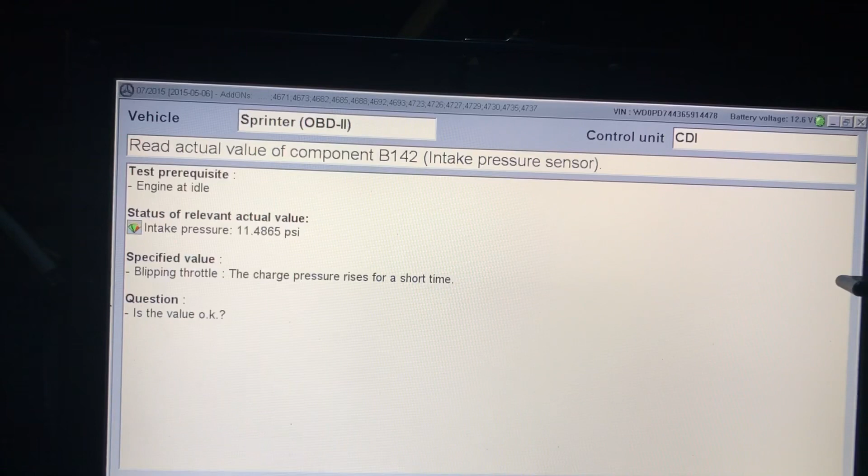And let's hit start. And hit stop. And I say no.

And it tells me where the lines are between the components: B142 intake pressure sensor and charge air distribution pipes, for leaks. There's definitely a good chance that the charge air distribution pipe is leaking, the resonator pipe, because it's plastic on this one. I do have a metal one, and I think it could use one. I think that's probably why it's causing this issue.

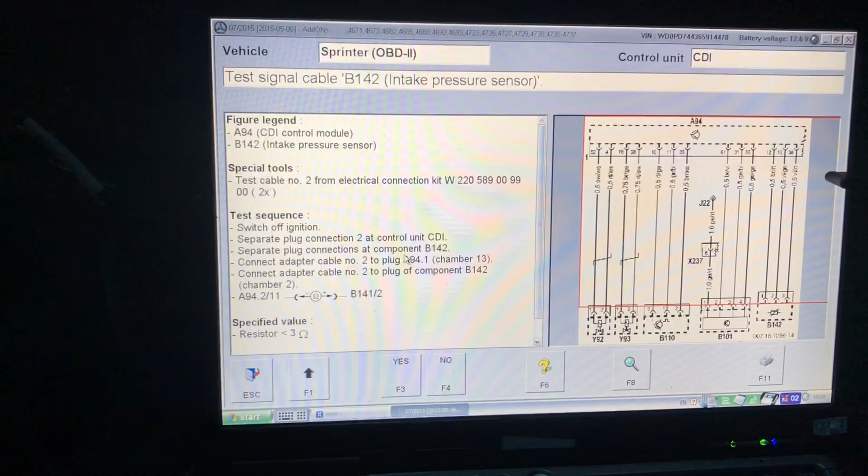To test the signal cable for B142 intake pressure sensor. Figure legend, so we have some tests here. Test sequence: switch off ignition, separate plug connection 2 at control unit CDI, separate plug at component B142, blah blah blah. And it says specified value: 3 ohms resistor.

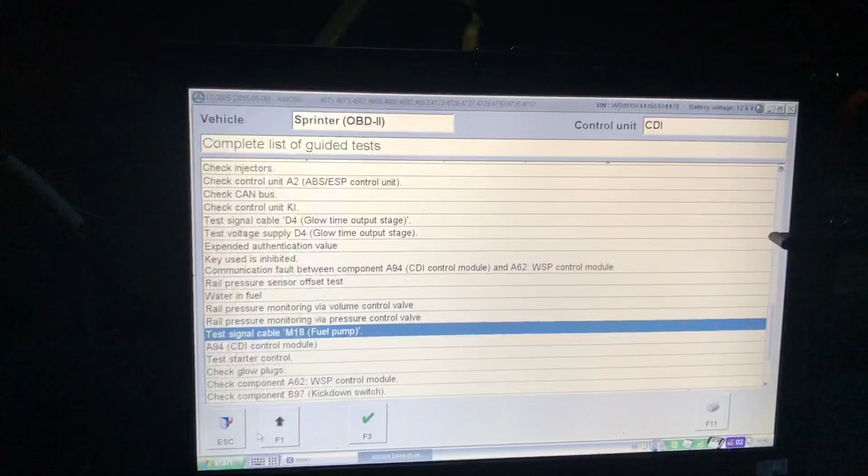Let's just open up one of them. Well, not that one, but basically it would give you a whole guide for testing this type of stuff, whatever's faulty and what's not. I could tell one thing is, it's very time consuming. I've been sitting at it for like 2 hours, just looking through all the systems. So it gives you a guide for repairing stuff and what needs to be done and what not, which is kind of cool.

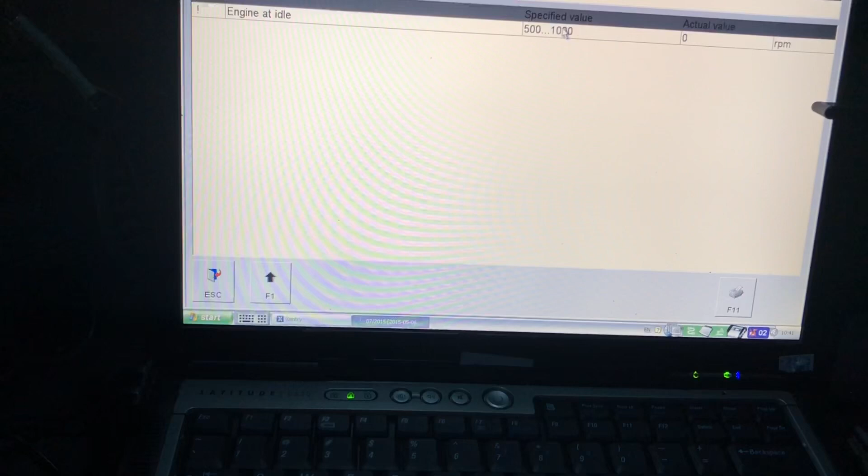But anyways guys, thank you so much for watching this video. This is my short video, just kind of a, I guess, not so quick rundown of this Star Diagnostic system. But I'm pretty sure a lot of stuff that I mentioned is probably going to be of interest to many of you guys, and possibly you got a chance to see some stuff that maybe you thought your car had, but didn't know it had, but now you do.